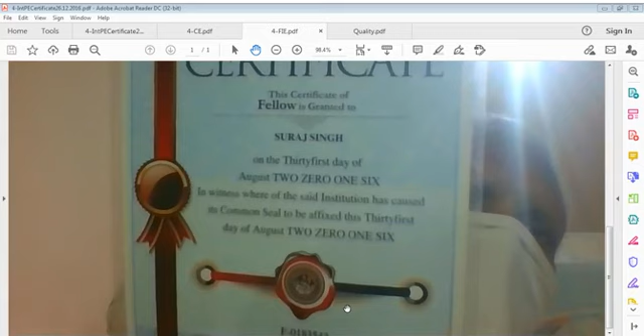Usual or unusual talk may be, everybody is competent to some extent in profession. If you are a professional, if one is professional, which means one has certain degree of competency, that has to be accepted. That competency, consistency, standards of working, standards of thinking must be in line to certain expectations - that this person, this functionary, whoever it is, has certain competent level and shall work to requirement of whatever nature. That is what do we understand by certain certified professionals who are well experienced as well.

This is what I think and everybody thinks. You see, details cannot be run in beginning. Let us understand this. Details cannot be run in beginning. This is what professionals must understand, and I too.

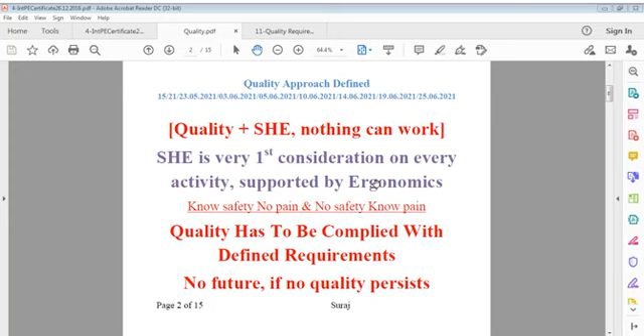Quality is something that you have to comply with, that's it, nothing else. But it is an important one. You have to comply with it. You can't run away if you are really in the profession.

Civil engineer particularly is a role of life. People may not like civil engineering because it's a hard field, it's a very difficult field, meaning you forget your dressing sense, you forget your personal sense. That is what it is. If you are by choice a civil engineer, you are fortunate. And if you are not by chance, by some other means, that's your choice. But remember, engineers have to change the quality of life.

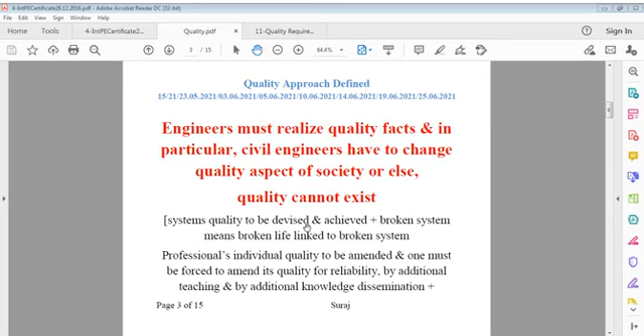I have to say only that realize facts. Engineering is a factual world. It's not hypothetical. Engineering is a factual world where resources are used - human resources, machines, equipment, and other resources. You have to do that, whether or not you like it. No way out.

Quality control is a second consideration. Do not mix up two issues. You should know why this testing is going on, what's the requirement. It's not simply saying that test is required here, you have to explain why it is as such.

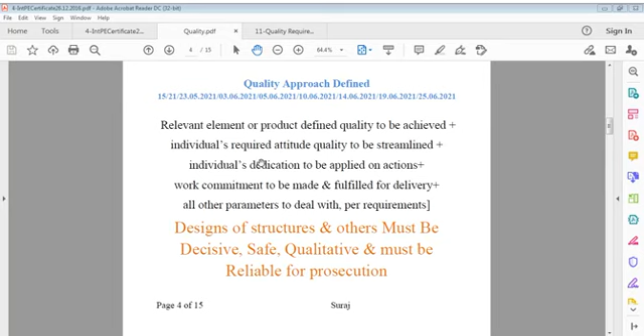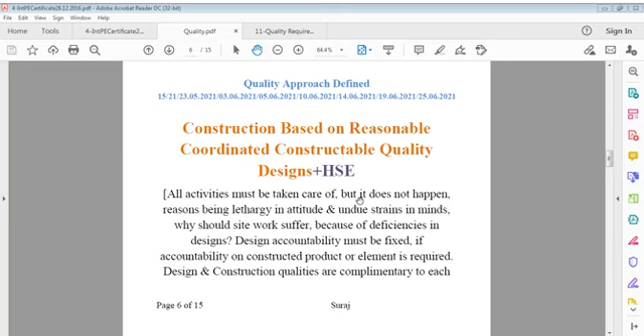I say engineering is big. Construction is much bigger than design in the sense of working. Construction can't be done without quality. If we do it without quality, we subject people to risk, some risk, if we are not sure.

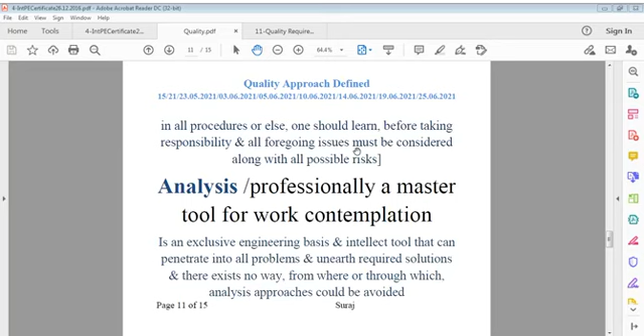How many times you can think depends upon that. As many times as you think, you can analyze that many times. Remember, you are questioning yourself in doing analysis. You will raise those questions to answer too. You have to understand that, think that way.

Sometimes I feel it difficult to explain about systems. Engineers take a different way. They are not interested in systems. They are only interested in solutions by designs, and they are not even interested in quality of working. This is really unfortunate how it is. Why do we not care for that? We have to think.

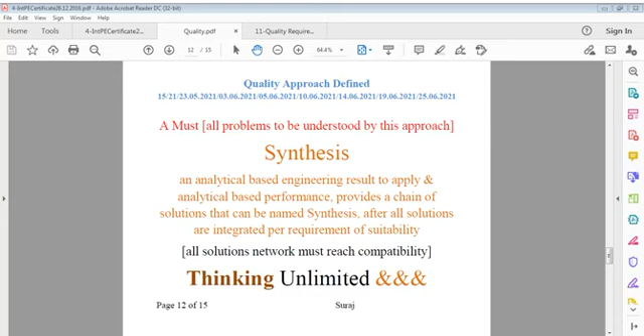Requirement of quality.

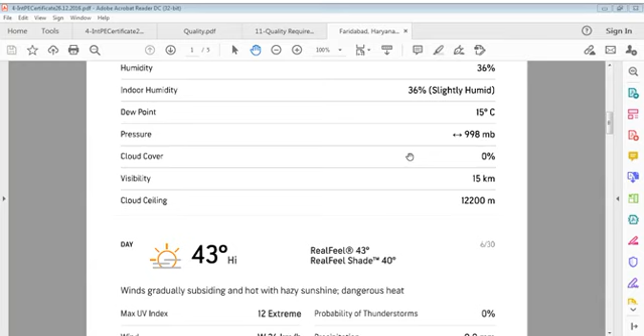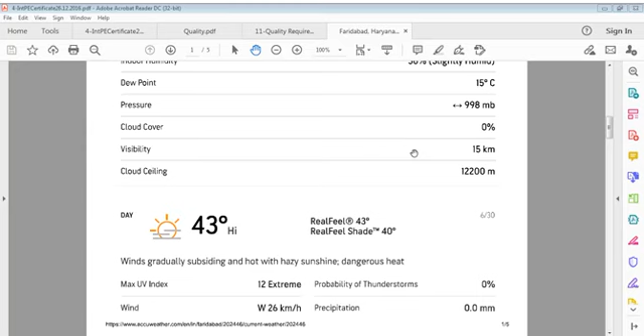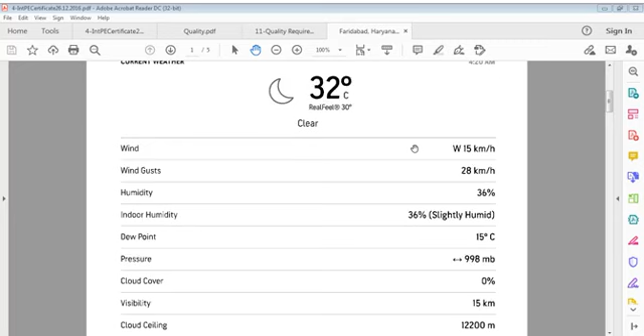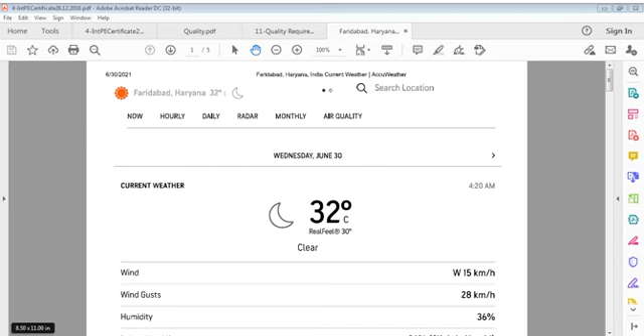It's hot early morning, I think it's 32. Let me see how much it is. Weather conditions, what it says now. Yes, it is 32, or 43 in daytime. So it's showing 32, if you want to see, I can show you, no problem. This thing is printing out, you'll see this print. You can see Wednesday, June 30, 32 degrees, 4:20 a.m. Wind is 15 kilometers per hour, western winds, and gust is 28 kilometers. Humidity is 36, indoor humidity too is 36 - you see, indoor and outdoor both. Dew point is 15, pressure is this. Cloud ceiling is 12.2, that is cloud. So it is clear, of course. Day is 43. Index may be 12, I can't say at this moment, so index would be 12. Wind gust could be 26, while in evening it is said expectation of wind gust is 44 kilometers. So high winds expected at night. It's just for your information, I tried to tell you - early morning, 32 degrees, 4:20 a.m. It's very much informative, so no problem. Let us see. I close this now, come back to my work. I close this, go, that's it. So we come back to reality of life.

Quality requirement - when we say quality system, we say quality controls, but actually it is quality requirement. Quality system and quality controls define quality requirements, and requirements vary from project to project, from work to work, and these also vary from engineer to engineer. When I say engineer, I mean design engineer or major engineer, where policy matter is decided. I'm talking about that.

Requirement of quality - when we say requirement, it means it's not a question mark. It's a mandate. We mandate this. You have to do that. Mandate is there, it can't be discarded.

Everybody is, of course, governed by something. And we too, in engineering, are governed by many, many rules, many regulations, many codal impacts. We can say requirements - codal requirement, specification requirement, design requirement. All these documents that we contain in contract, or otherwise if there is no contract, whatever documentation speaks, if these are accepted as contract documents, we have to abide by them until there is something wrong, until there is some change.

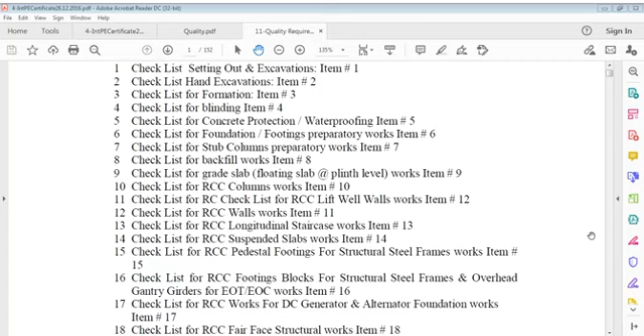Then we go to footings, where design starts. Structural design comes into play starting at footing work. Then further structures, whatever they are, stub columns or grade slab or others, then columns, walls, suspended slabs or other slabs all keep on moving. So we have to keep that point also in mind.

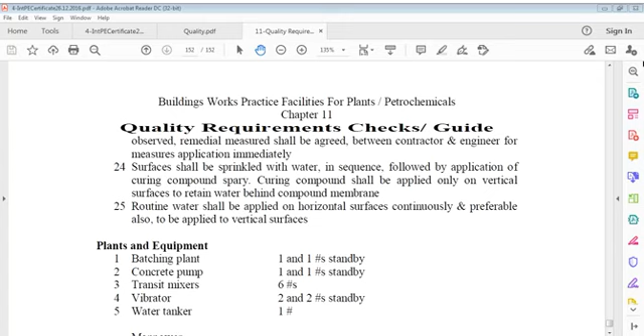This is the last page of this file, but I just came here for going up.

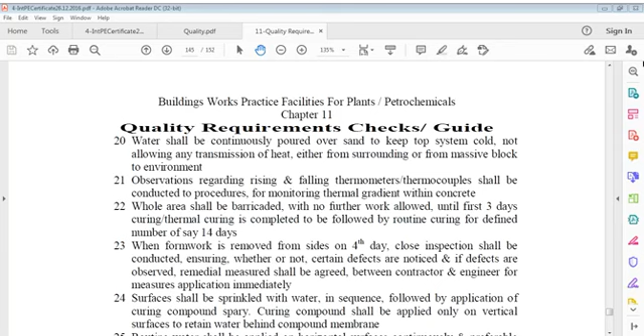Tabletop. I was talking to you about tabletop.

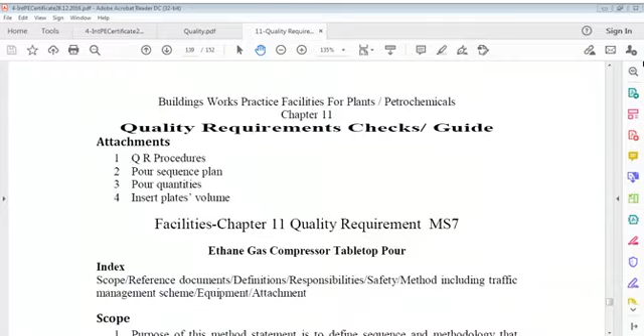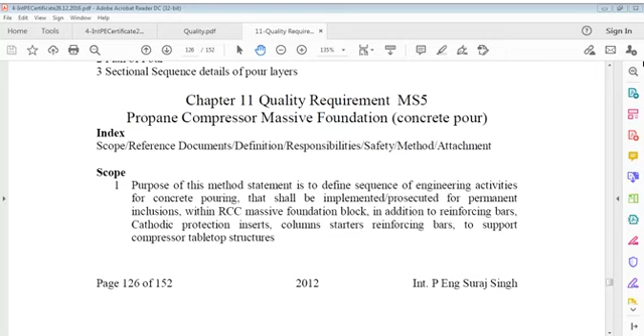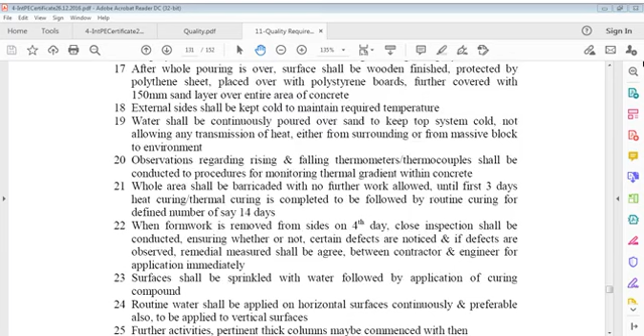I think I'll come more forward, massive foundation. Yes, it is that. I put this chapter name also now.

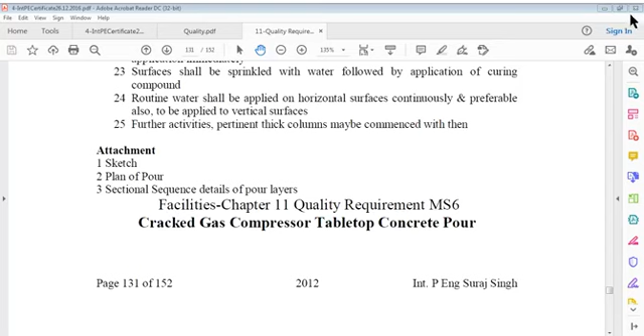Tabletop concrete pour. Tabletop means it's still compressor or heavy equipment foundation, heavy equipment vibratory foundations. We design based on vibratory machines.

So we have to now move on to this talk, I think I have taken 1 hour by now, maybe. Yeah, it's almost 1 hour is over.

This tabletop is actually, you can say, final concrete on which it's a kind of platform. Though structurally it's a beam design, it acts as a platform for the machine that has to come in, and that is a compressor machine, a rotary or turbine-like structure. It has to be permanently fixed to this tabletop.

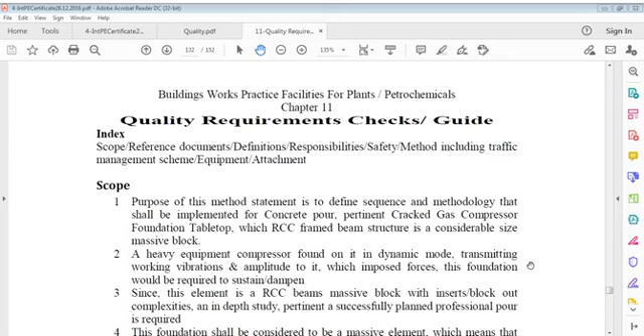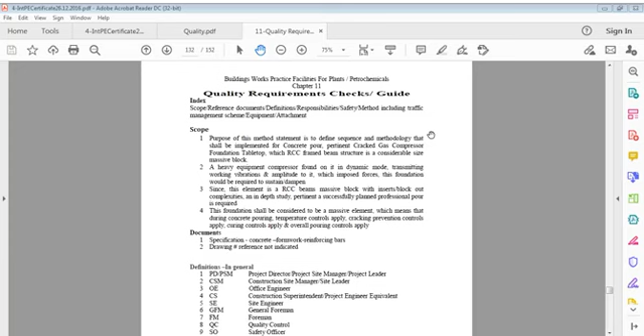So I can see that you have to hold for some time. I'll just lay it down so that you can read it for 10 minutes. Meanwhile, I'll be back. Let me take water also again. I'm feeling very dry today, I don't know why.

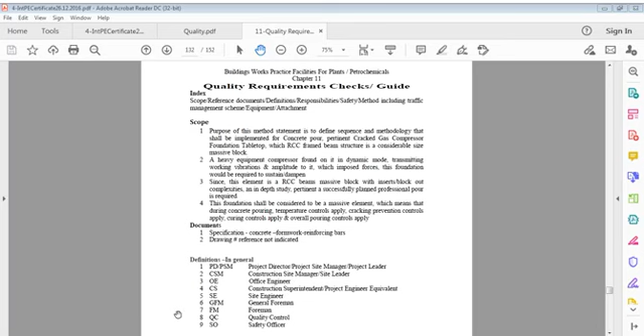Sorry gentlemen, little late because I had some problem there. So I was talking about quality in this case, and this quality which I was talking is now taken up again. Yesterday I took up this tabletop issue, the cracked gas compressor tabletop concrete pour, and now I'm continuing it further.

In this case we have the same index reference, same scope reference, documents, definitions, responsibilities, safety method, including traffic management scheme, equipment attachment, whatever is required, we have to do it. And scope is very easy, it says what is the purpose after all.

In scope we have to say the purpose of this statement is to define the sequence and methodology to be implemented for concrete pour pertinent to cracked gas compressor foundation tabletop, which is RCC frame beam structure of considerable size, a massive block. Considerable size means it's not as massive as the other foundation, smaller than that, yet it has a complicated steel arrangement.

Sizes of beams are not that massive, but we have to take care to consider it's massive from various viewpoints. You can say a heavy equipment compressor found on it, in dynamic mode, transmitting working vibration and amplitude to it, which imposes forces this foundation would be required to sustain or dampen.

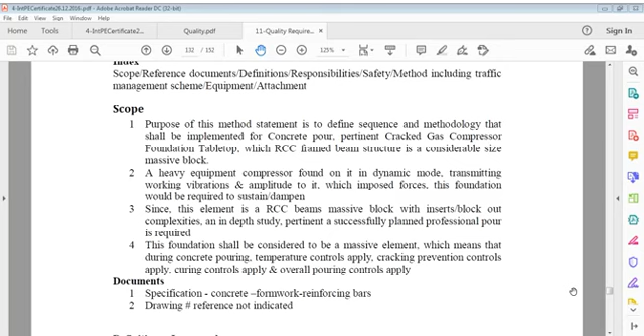So what actually do we need for this? We have documents which give specifications of concrete, documents that give specifications of formwork and reinforcing bars, and of course we have to refer to steel plates, fabrication, tanks, all that, and other drawings too.

We have got certain definitions also discussed previously, in which case we can say there is a varied range of personnel in this activity - that is project director or project site leader, construction leader, office engineer or technical leader, construction superintendent or project engineer equivalent, then site engineer, general foreman of course, supervisor, quality control and safety.

These are very limited, but you can expand their responsibilities or titles. There's no mandate on this, but just support that this should be the minimum. You can strengthen this, you can elaborate, or you can give more responsibility, or you can keep more people if the scope of the job is expanded.

It depends, and all of these are responsible in one way or other. When we say project director or leader, who is responsible for everything - I mean to say contractually - who has to be responsible for arrangement of material, supply of materials, resources, particularly arrangement of finances for work. That is a major point, and also has to take care of all document movement from one office to another, and has to submit documents for the purpose of obtaining approvals from the company or from the client or engineer or employer's representative.

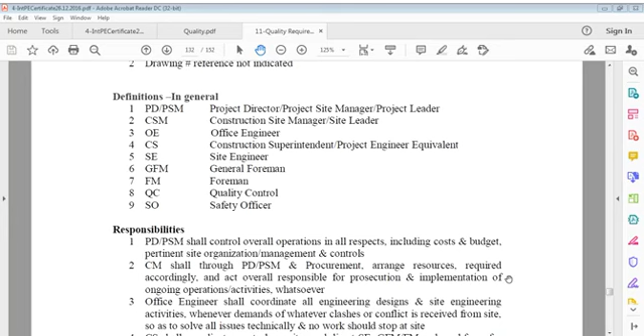So it's important, the construction leader, then office engineer, which is a different world, meaning every site engineer has to do his job, every construction manager has to do his job, but this engineer is a different type of lead.

When problems are seen conflicting with each other, clashes do happen and they cannot be dealt with separately. That issue comes to this technical person, who further coordinates on them, digging out from various methods, various records, document controls, and tries to find out - maybe something is missing - so that I can tell you from here itself.

But when really something is missing, information is not available, clarification is required, or some proposal is to be submitted, in that case technical work is done. You can say collaborative work is done.

Deliberations are made, and proposals or submissions are to be done for whatever reason. The office engineer, because he has most exposure to documents and technical base, can read and understand everything. If that personnel says we need some information from the engineer or client, a site technical query can be raised for clarification, a proposal, or a problematic solution.

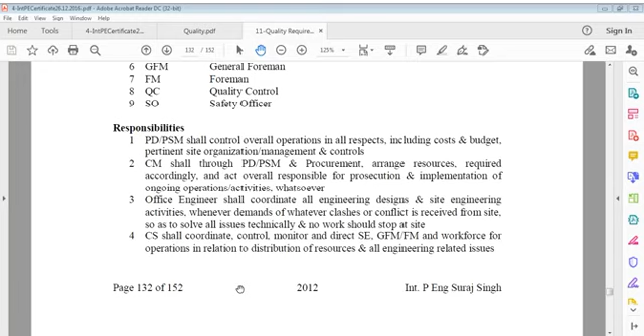Everybody is not happy with such engineering activity. People want to rush the project, like contractors, and there's nothing bad with that. Then there are many other responsibilities, I can't name all of them now.

We have to go to safety and see how safety would work on this tabletop. Everywhere there is a safety officer, nothing new here. That safety officer is required to monitor all activities going on site, checking what site engineers are doing and whether they are complying with requirements. If they fail to comply, the quality person has to confront them and explain what should be done.

It's not only site, it's also other places where quality is important. If you don't consider quality important, you will certainly lose something. It says safety officers shall monitor all daily activities, advising site engineers if some measures are missing. Every engineer knows safety; if not, they have to train themselves.

Because of hundreds of workers at one location, it's sometimes difficult to answer questions, but you have to answer because you are an engineer. You can't escape it. Safety officers shall monitor all daily activities, advising site engineers, and if some measures are required, notification shall be given and the site guys have to do it.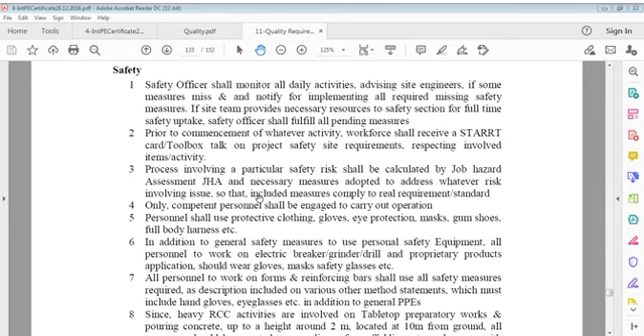So it says the process involving a particular safety risk shall be calculated by job hazard assessment, and necessary measures adopted to address whatever risk is involved, so that the included measures comply with the required real requirement, standard only.

Only competent personnel shall be engaged to carry out the operation.

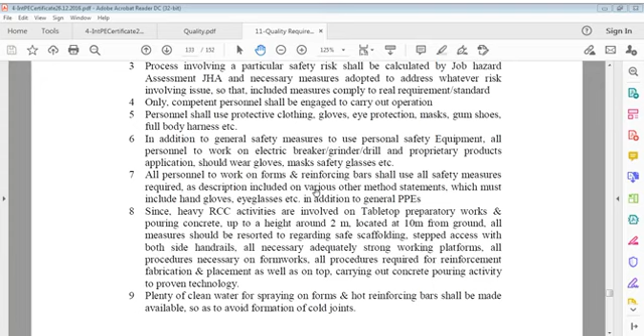Personnel shall use all protective clothing, gloves, eye protection, masks, gum shoes, full body harness, etc., as usual, in addition to general safety measures. All personnel working on electric breakers, grinders, drills, and proprietary product application should wear gloves, masks, safety glasses, etc., whatever is required for protection of body parts. All personnel working on forms and reinforcing bars shall use all safety measures as described in various other method statements, which must include hand gloves, eyeglasses, etc., in addition to general PPEs.

Since heavy RCC activities are involved in tabletop preparatory works and pouring concrete up to a height of around 2 meters, located at 10 meters from ground, all measures should be resorted to regarding safe scaffolding, stepped access with both side handrails on formworks.

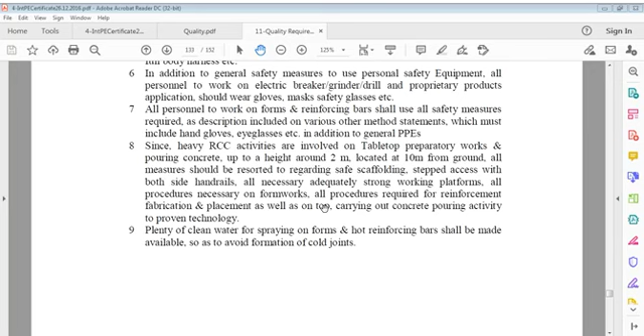Plenty of clean water must be available for everything. Ample quantity of water should be available on site for workers as well as for other purposes. Drinking water should be available on site for the workforce, and tea breaks should be allowed.

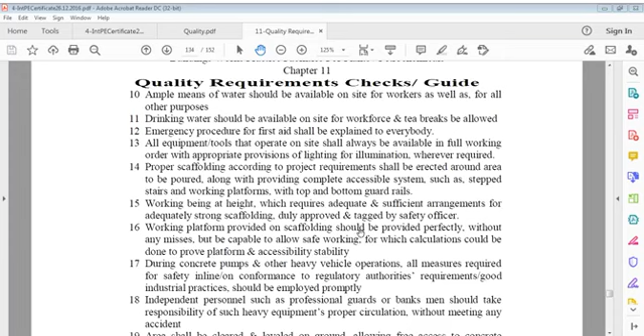Emergency procedures for first aid shall be explained to everybody every day. All equipment and tools that operate on this site shall always be available in full working condition and working order.

Emergency procedures for first aid shall be explained to everybody, as it can happen and can be required. All equipment and tools that operate on site shall always be available in full working order and sequence, with appropriate provisions for lighting and illumination wherever required, at night time or whatever time, depending on availability of concrete and availability of pump.

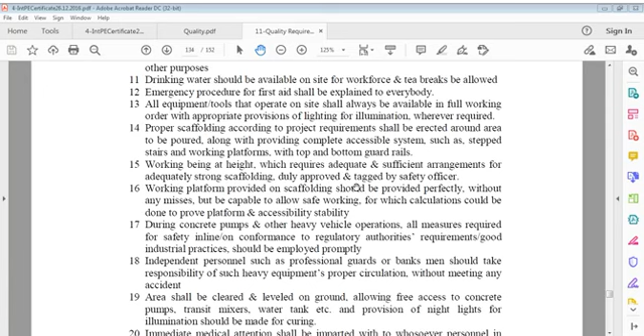Proper scaffolding according to project requirements shall be erected around the area to be poured, along with providing a complete accessible system such as stepped stairs and working platforms with top and bottom guardrails. Working at height requires adequate and sufficient arrangements for a strong scaffold, duly approved and tagged by the safety officer.

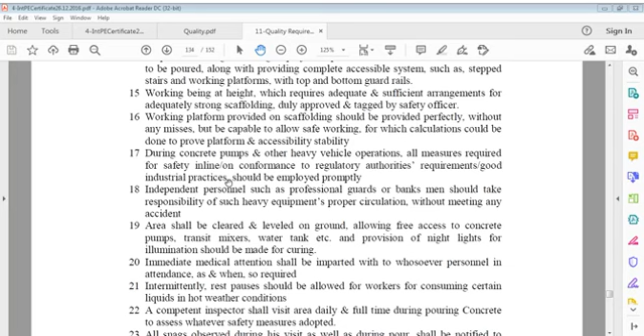Working platforms provided on scaffolding should be provided perfectly without any misses, and must be capable of allowing safe working, for which calculations could be done to prove platform and access stability. During concrete pump and other heavy vehicle operations, all measures required for safety shall be in line and in conformance to regulatory authorities.

We have to consider this point very importantly: that independent personnel, such as professional guards or banksmen, should take responsibility for the proper circulation of such heavy equipment without causing any accident.

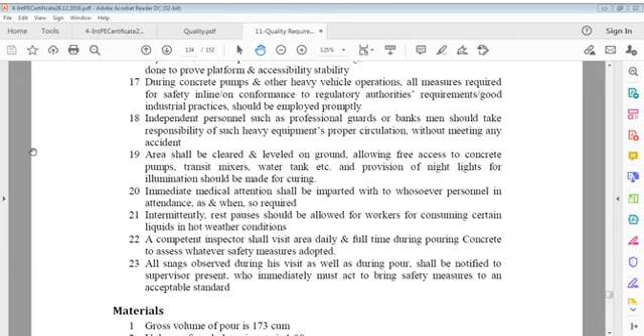The area shall be cleared and leveled on ground, allowing free access to concrete pumps, transit mixers, and water tanks. Provision of night lights for illumination should be made for curing. Immediate medical attention shall be imparted to whosoever personnel in attendance, as and when required.

Immediate medical attention shall be imparted to whosoever personnel in attendance, as and when so required. Intermittent rest pauses should be allowed for workers, whatever the number of personnel, for consuming refreshments.

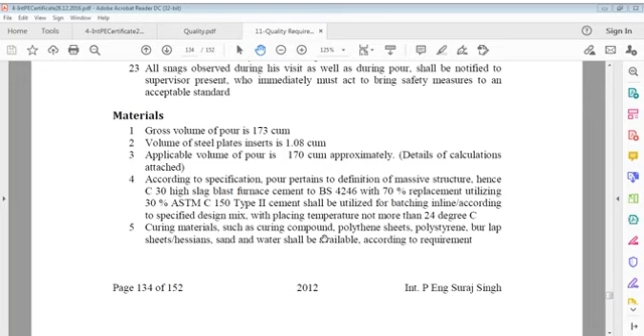So this is the specification of the concrete that we need to place: GGBS 70% replacement of ASTM C150 Type 2 cement. That is environment friendly—70% reduction means 70% of the carbon dioxide impact is taken out of this concrete. SRC cement is not required here because SRC doesn't work in this case when you use the GGBS pattern. Sulfate resisting patterns are already covered. So we have to think now how to do it.

Now we have plants, we have one batching plant—I mean batching plant mixer I am saying, there may be many mixers in one batching plant. So one should be standby for safety reasons, for emergency reasons. There should be a concrete pump because it is a big pour and we don't want joints. We need one standby concrete pump. Maybe it's not on site, it could be somewhere else, but it should be ready.

It should be able to be reproduced within a couple of minutes—20 minutes, 30 minutes, 35 minutes. In this case we can't wait for more time. Concrete has to come in, no cold joints. Then there can be transit mixers depending on frequency.

170 cubic meters to be poured - we calculate how many hours, per hour how many trips transit mixers can take. It depends on that calculation. We require vibrators, generally 2 in this case because it's a big pour, maybe 3, plus some standby. And water tanker is certainly needed if there's no direct water pumping.

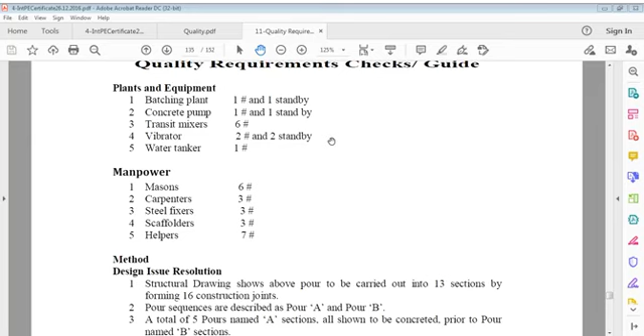Manpower depends - in this case 6 masons or more are adequate. Carpenters: since the work is already done, only protection of work during concrete is required, so 3 carpenters, not surplus but required in case some happenings take up the work fast. Then there could be scaffolders, steel fixers, helpers, etc.

Now there is a design issue in this case. When you started this work, on the tabletop it was divided into 13 sections, partitioned into 13 sections - I don't know the reason behind that. These were named A and B. There were 16 construction joints in the beginning of the design, which initial design I don't know if it was worked out properly or copied and pasted, I can't say even today.

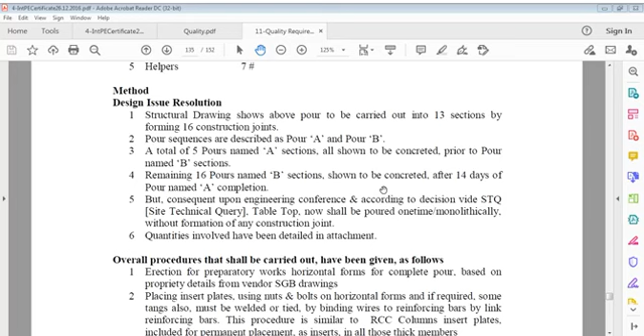What we do, consequent upon the engineering conference and according to the decision vide STQ (site technical query), it was agreed that monolithic action will be applied. The tabletop now shall be poured one time monolithically without formation of any construction joint. Quantities involved have been detailed in the attachment. So the overall procedure that shall be carried out is given as follows.

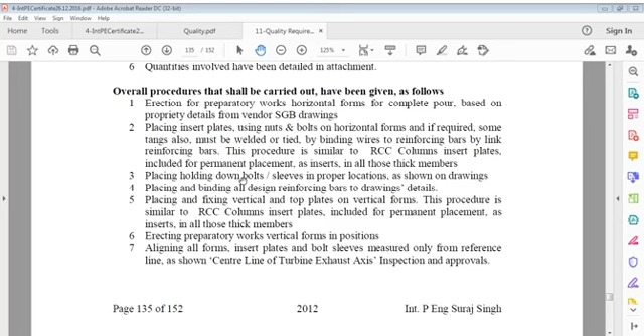The overall procedure that shall be carried out: erection for preparatory works, horizontal forms for complete pour based on proprietary details from vendor or sample, and SGB drawings. You have to depend on works prepared by some vendor who is a specialist subcontractor.

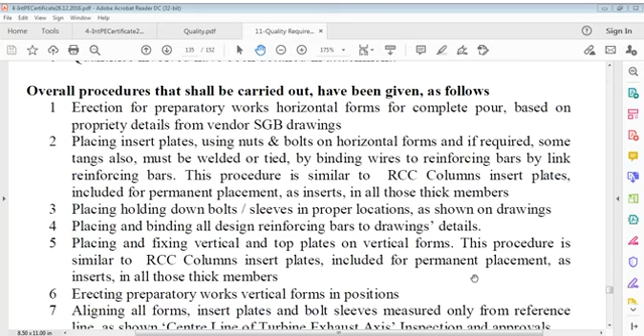Now we have to insert plates there, fix them at the correct locations - these are on bolts or similar. So we can say: placing and fixing vertical and top plates on vertical forms. This process is similar to RCC column inserts, plates included for permanent inserts in all areas.

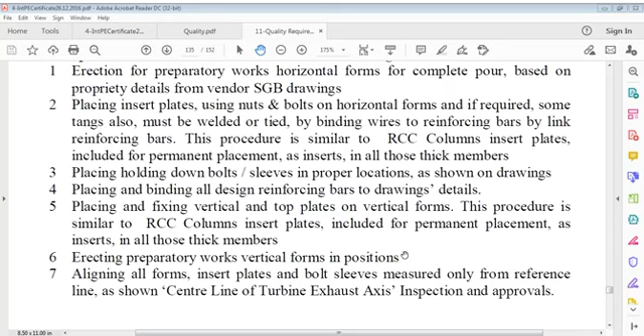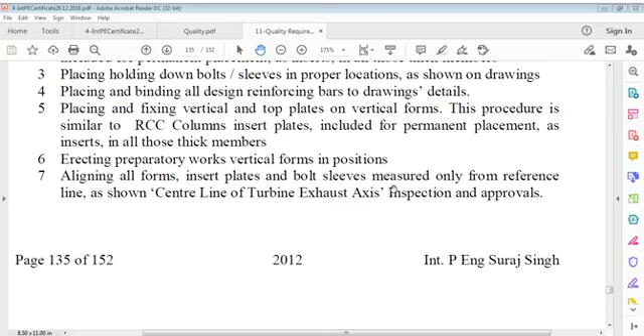After alignment is over, we have to go to erection of adequately safe scaffolding. These are preparatory works - we have to make sure first of all our supporting system is in place, with adequately safe working and safe yield.

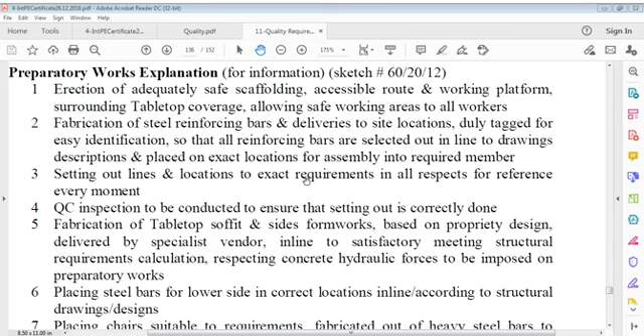So we have to now do erection of adequately safe scaffolding, accessible route and working platform surrounding the tabletop coverage, allowing safe working areas to all workers. Fabrication of steel reinforcing bars and deliveries to site locations, duly tagged for easy identification.

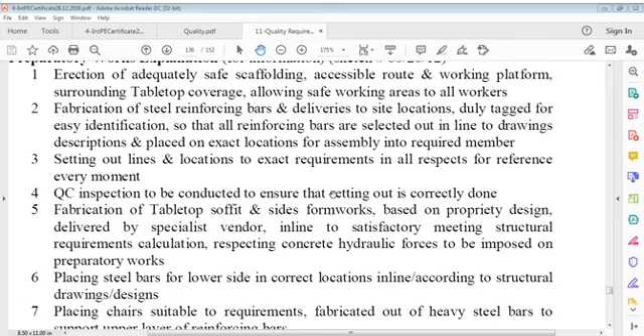Now, fabrication of steel reinforced bars etc. is done, setting up lines and locations to exact requirements in all respects for reference every moment. QC inspection to be conducted at all times. Fabrication tabletop soffit and sides formworks based on proprietary design, delivered by specialist vendor in line to satisfactory meeting structural requirements.

So we can say all this steel reinforcement and shutters were done accurately as required. We have to place steel door bars, we have to provide chairs, placing steel bars for lower.

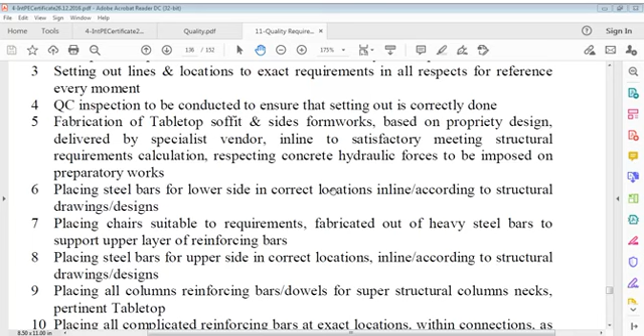Hence, if you go further, you have to completely do the work of neck columns as we left last time, because this is a frame. You have to complete that work and completely pass through whatever is needed.

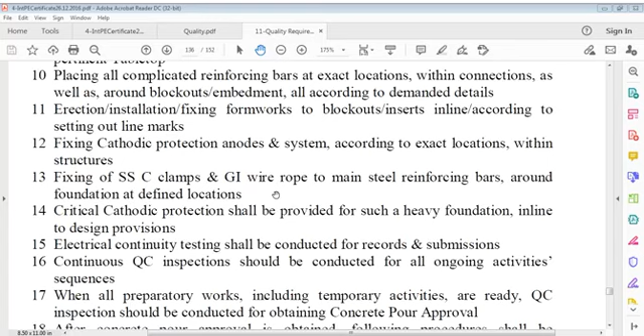This should be more on this. We can say we have to provide cathodic protection, we have to provide electrical continuity test on that. Then QC inspection is required, and all preparatory works, including temporary activities, are ready. Then QC inspection.

Then, when all preparatory works, including temporary activities, are ready, QC inspection conducted shall follow.

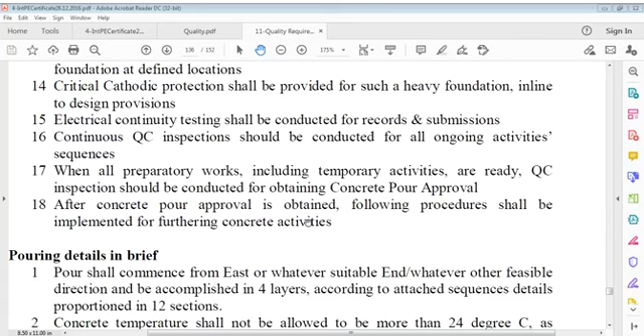Producing, pouring details in brief now. What are those? Pour shall commence from whatever end, I'm saying east here, whatever, doesn't matter, whatever other feasible direction, and we accordingly execute.

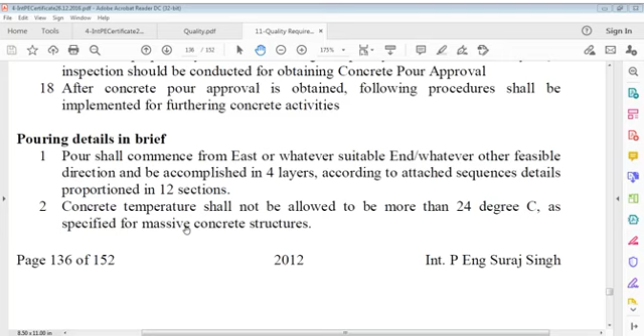It says pour shall commence from whatever end in direction and be accomplished in 4 layers according to attached sequence. Whatever sequence you have to decide how you can do it, it can be that way. Concrete temperature shall not be allowed to be more than 24 degrees Celsius as specified for massive concrete structures.

Immediately after pouring is finished, curing compound shall be sprayed and the surface be covered with polythene sheet, polythene membrane.

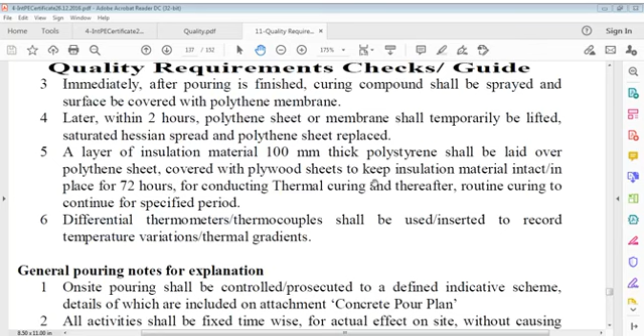General pouring notes for explanation. On-site pouring shall be controlled and prosecuted to a defined indicative scheme, details of which are included on the attachment, a concrete pour plan. You have to plan which way you want to take it, in layers or a different way.

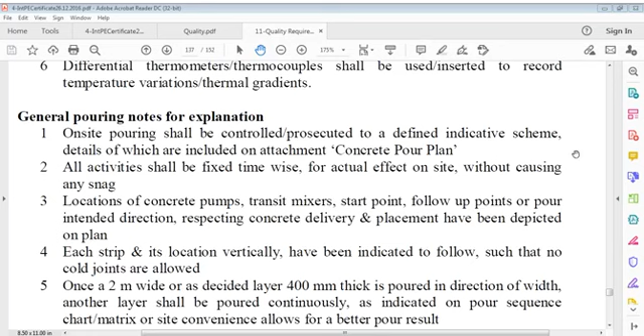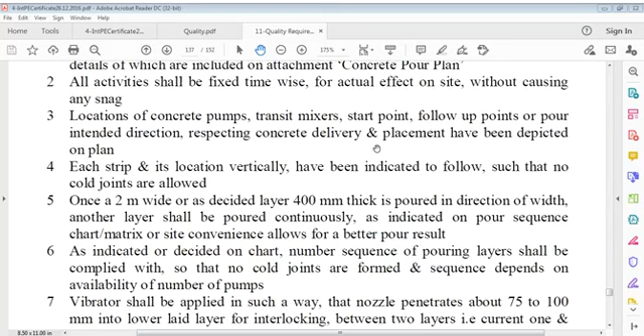We can now say that for each strip, you can see the location of the concrete pump, transit mixer, start point, and follow-up points. You have to see all this. Once on-site pouring is controlled, all activities shall be fixed time-wise for actual effect on site without causing any snag.

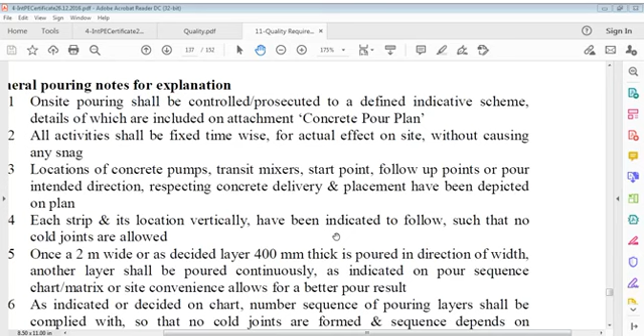Location of concrete pump, transit mixer, start point, and follow-up points are intended, and each strip and its location vertically have been indicated to follow.

Each strip, and the location of the concrete pump etc., all machines and equipment shall be marked on that plan and fixed accordingly. Concrete delivery, concrete placement, all on the plan. Each strip and its location vertically have been indicated, and you can devise that yourself.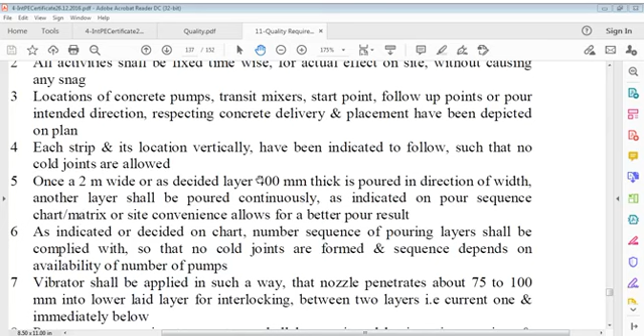Each strip and its location vertically have been indicated to follow such that no cold joints are allowed. Once a 2 meter wide, or as decided, layer 400 mm thick is poured in direction of width, another layer shall be poured continuously as indicated on pour sequence chart. Matrix and site convenience allows for a better pour control for results, as indicated or decided on chart.

Number sequence of pour layers shall be complied with so that no cold joints are formed, and sequences depend on availability of number of pumps.

Vibrator shall be applied in such a way that the nozzle penetrates about 75 to 100 mm into the lower layer for interlocking between the two layers, that is the current one and immediately below.

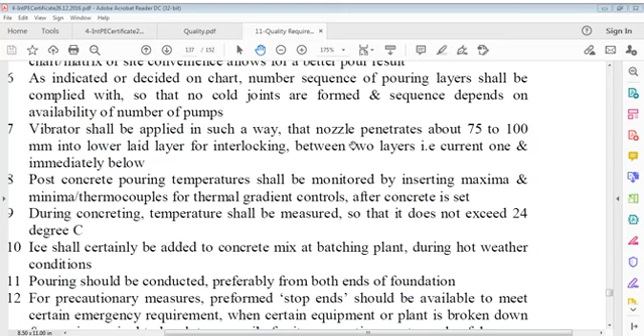Post concrete pouring, temperature shall be monitored by inserting maxima-minima thermocouples for thermal gradient control after concrete is set. During concreting, temperature shall be measured so that it doesn't exceed 24 degrees Celsius.

For precautionary measures, preformed stop ends should be available to meet certain emergency requirements when certain equipment or plant breaks down and the pour is required to break temporarily.

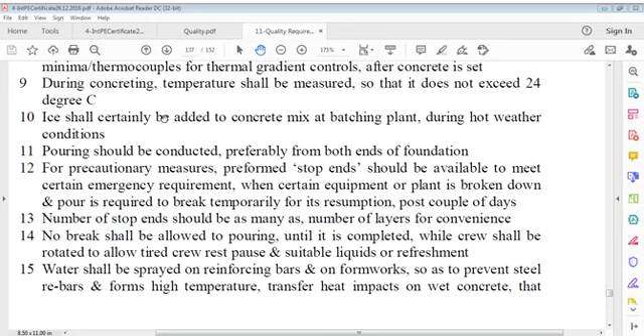Water shall be sprayed on reinforcing bars and on formwork so as to prevent steel rebars and forms from reaching high temperature, which would transfer heat impacts on wet concrete that would otherwise cause a certain status of flash setting. Flash setting of concrete is not permitted. Cold joints within concrete are not permitted. It shall be ensured that constant water...

So we have to see that immediately after, it shall be ensured that cathodic protection equipment, anode clamps, and GI wire do not get damaged during pouring. Immediately after the top layer is laid and finishing is carried out, curing compound shall be sprayed following covers with...

Immediately after the top layer is laid and finishing carried out, curing compound shall be sprayed following covering with polythene sheet.

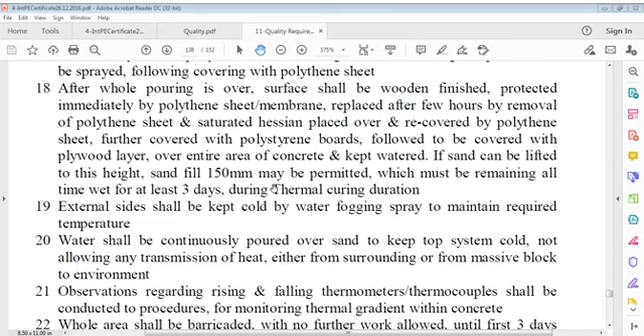If sand can be lifted to this height, sand fill of 150 mm may be permitted, which must remain wet at all times for at least 3 days during the thermal curing duration. External sides shall be kept cold by water fogging spray to maintain temperature.

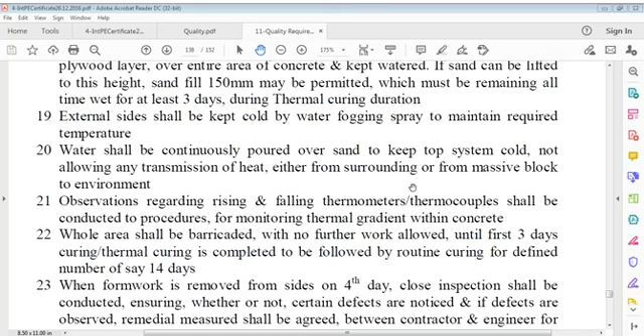Water shall be continuously poured over sand to keep top system cold, not allowing any transmission of heat either from the surrounding environment or from the massive block to the environment.

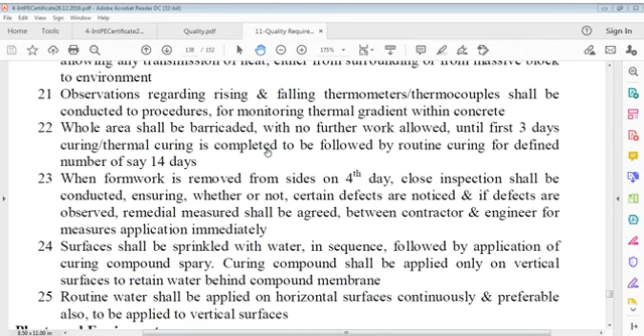When thermal curing is completed, it shall be followed by routine curing for a defined period of 14 days. When formwork is removed from the sides on the fourth day, a close inspection shall be conducted to ensure whether or not any defects are noticed. If defects are noticed or observed, remedial measures shall be agreed between the contractor and engineer for immediate application. Surfaces shall be sprinkled with water in sequence, followed by application of curing compound spray.

Curing compound shall be applied only on vertical surfaces to retain water behind the compound membrane. Routine water shall be applied on horizontal surfaces continuously and preferably also applied to vertical surfaces.

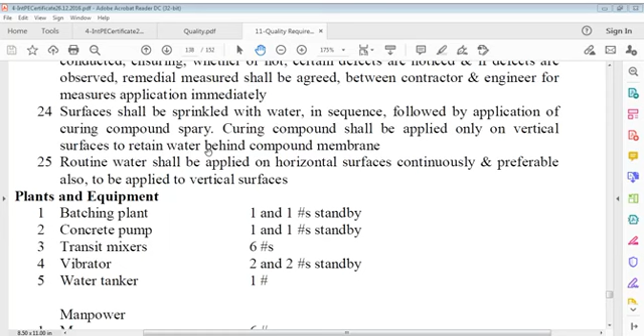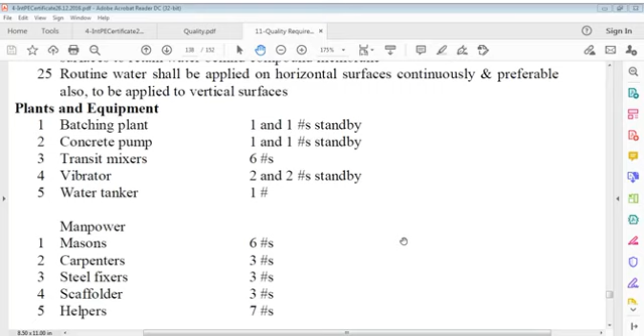What we actually need in the batching plant is one standby and one working unit. Concrete pump also one, transit mix of six numbers, vibrators two and two, water tanker one. Manpower: masons six, carpenters three, etc.

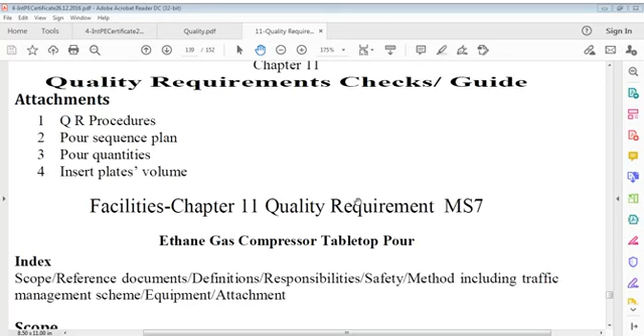Depends on that. So we'll take up ethane gas next time. So today we have taken up various issues in this quality talk.

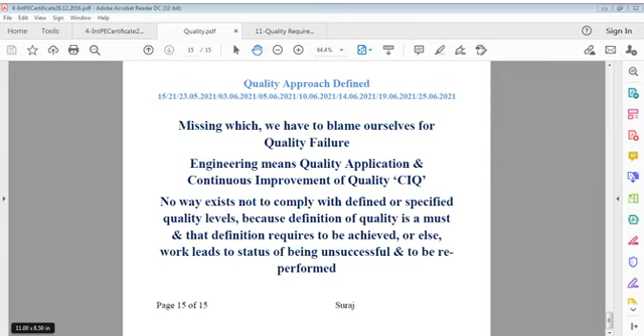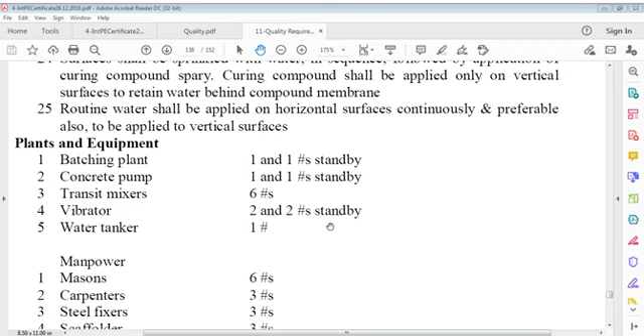We have taken up various issues in these talks. The quality that we want to achieve is not easy. People have to understand what we actually provide. Engineers have to work a lot. It's not simply design - if you see the facilities chapter 11 quality requirements, we have to take care of that. It's not easy, it's difficult in fact.

So I think it's now time to possibly close down, already three hours are over. Of course I reviewed something during this talk as well and gave time to you to read.

I'm talking about these method statements to you. These are very important tools, professional documentation of activities that you are going to do. Such records would help you in future if you maintain them, because I find that engineers are not very much interested in writing method statements for the purpose of quality. They are only interested in quality controls, which is only a small part of quality.

If your work information is not given to everybody, people may not know, because they are not clear about quality controls. Everybody should be clear about this. If your workers and staff are not interested in quality controls because testing is not within their ambit to understand, how to work on site is more important. If your work is safe, the system is naturally safe - of course you do your part in quality controls, but the quality system is what they should know you are following.